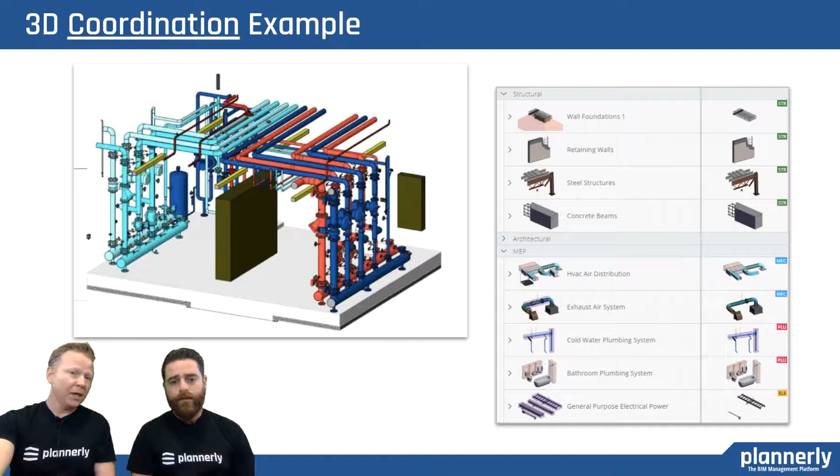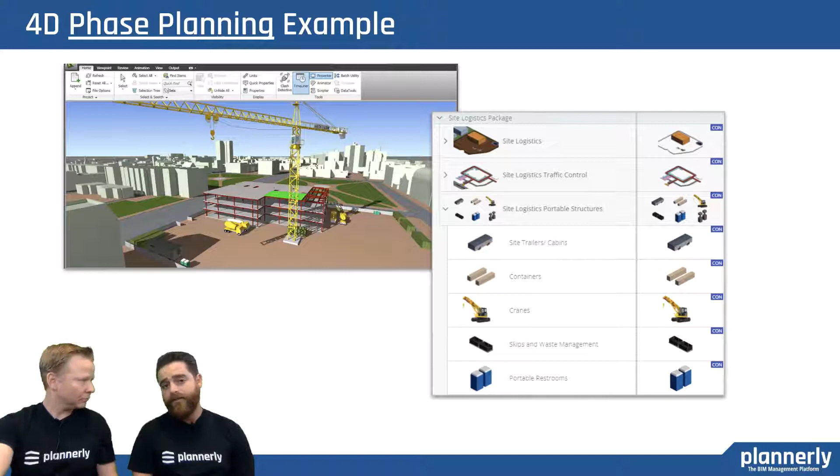But showing examples of what that might actually take, so you're on the same page, what the scope would be and what the output would be. And then 4D phase planning, showing the owner an example from a previous project. Again, seeing the amount of effort from the scoping and seeing the output is really powerful, and showing them all the benefits of that as well. There's a lot of safety now for phase planning. Sequencing and safety.

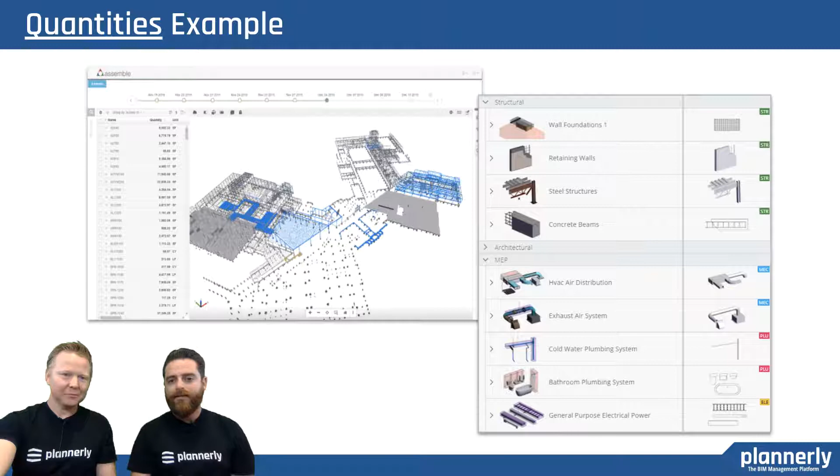And then quantities, how more accurate quantities might benefit the owner indirectly or directly. Being able to tighten the risk and be more sure on the outcomes is very important. These examples are more for helping them understand what it takes and giving them a little bit of education, not just saying we can do this, we can do that, but getting into the details of what it actually takes to accomplish these BIM uses, and it'll help them make a better decision.

And then a couple that might be more applicable for the owner: being able to virtually walk through their building, most popular now, taking different examples and that hardware to the meeting so that they can actually experience it has been very powerful and very well received. But understanding what the commitment is, what scope is required in order to get to that photorealistic walkthrough.

This is a really good example, because an owner who does not know much about BIM and what it might take might think, you're doing coordination, so let's do AR, VR. And they'll jump into the headset and go, hey, why is all the piping magenta? Why is the duct blue? That's not realistic. Is it really going to be blue in my building? And that right there is not aligning those expectations. They thought, you're already doing it in 3D, why don't you just slap some material on?

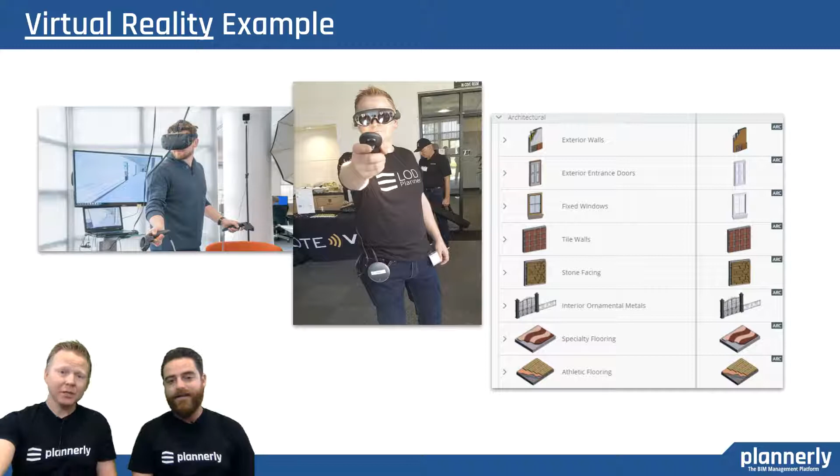We all know that's not a realistic expectation, as someone who knows what it takes. So understanding the finishes and the time it takes. It's not their everyday job. So again, that's just another example of those connections. And then one of the very key ones is what's required for handover at the end of that workflow.

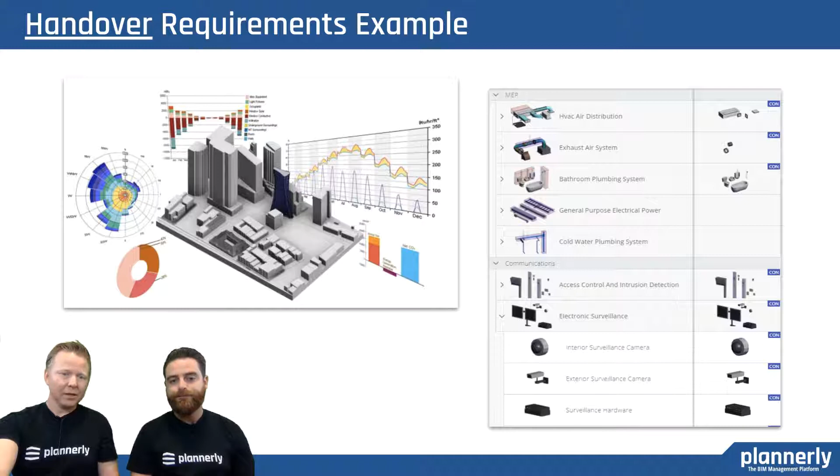And the person you might be talking to in that meeting, who's speaking on behalf of the client, may not be the person that runs the building afterwards and manages the facilities. So having the right person inside that meeting, bringing in the facilities manager or director, having them come in and say, this is the equipment I need, and this is the information it takes.

So Ted also understands that he can be too technical. One of the ways he is able to remain out of the weeds and not get into those detailed technical explanations is by using pictures. And a picture, we all know, is worth 1,000 words. So if Ted can build up that agreement using thousands of pictures, how powerful would that be?

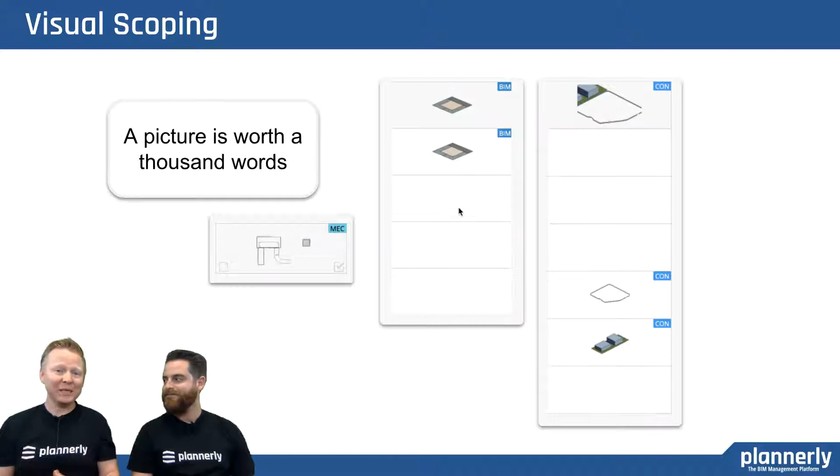And we know firsthand how owners absolutely love being able to truly understand what they're going to get in this way. So visually scoping the project is really beneficial when you're sitting down with an owner. It really helps, because going through an Excel spreadsheet or a long Word document, we all know we're going to zip right through it and say, yep, read it, agreed, let's go.

That was why Frank's guys were laying asleep. Yeah. He was reading every line item, showing an Excel spreadsheet with a bunch of numbers.

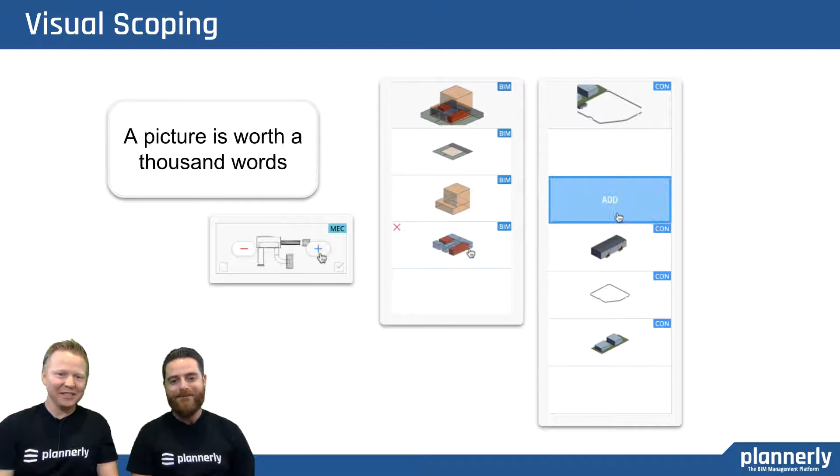Ted also understands that templates can save a lot of time and reduce risk. So rather than copying and pasting a whole bunch of things that he might not need, he can use templates and be selective. Yeah, and you know, we speak with a lot of people who are developing those templates because they understand that every project is unique, and bringing in that risk is not really great, not only for the client but for their own company and, you know, liability things that might come up.

So these templates, keeping them basic. If you are someone who is developing those templates, think about the non-project specific items, leaving yourself little red highlights or something that you can come right in and fill in that project information once you've received it. So a lot of that kind of workflow that you put into your templates that you're building alone or with your team could really go a long way. Yep.

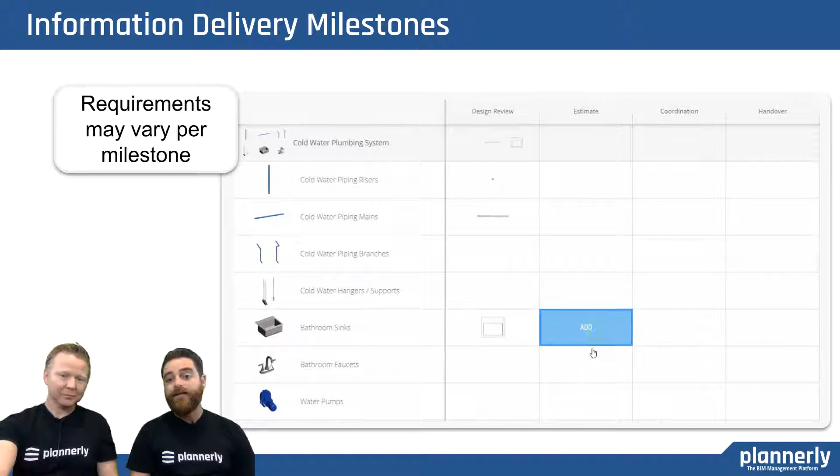Ted also understands that each BIM use can have completely different requirements. Right. And so he sees the ability to define information delivery milestones and vary what is required on each milestone. Yep. Pretty simple, using that visual nature, not asking for everything, not asking for the entire scope in the design review phase, only asking for certain information in the estimates, and then focusing on the actual coordination elements that will be needed. And along the way, scaling that level of information or level of geometry as it's needed, and not something that's just forced right at the first milestone. Yep, deciding when and which milestone is required.

Ted also understands that aligning expectations is everything. So what is important to the owner? I think Louis just mentioned that as well. In a milestone for delivery, we really want to understand which elements out of the set that we are creating for the project anyway does the owner want, and also what might be required that is not part of the existing scope for project teams.

And this is something we've heard a lot of feedback from our customers and users who are coming back to us and saying that they are now able to build a more collaborative scope with the owner because they get them engaged, because they invite them to help create this. Because they can understand it. They understand it. They're not getting lost in the definitions of this LOD or what's required; they are just keeping it down to the basics. Yep. But doing it together, not something that's saying, this is what I propose, or what do you think you should give me as a scope? Why don't we sit down, agree on the use?

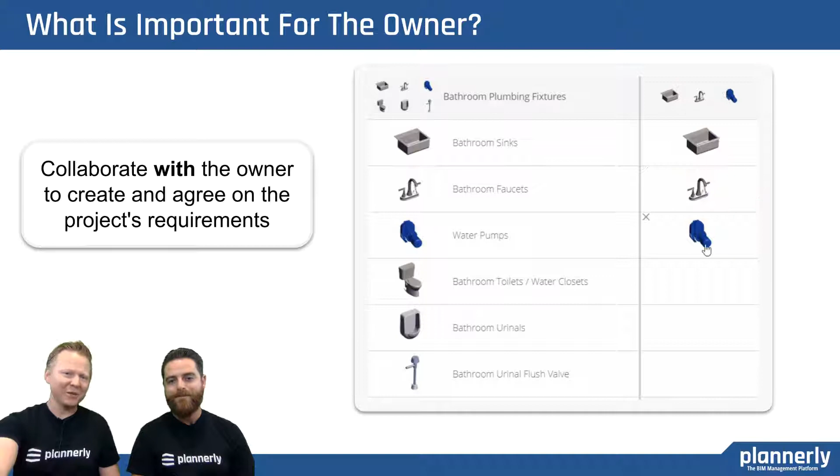It takes 45 minutes in a meeting room, and you see the difference between, yes, okay, Frank and Ted, but we have real life people that are also going through this process, and we have a couple of quotes at the end as well. So the principle is really interesting to be able to define this visually, but Ted also understands that it needs to be lean. So lean information requirements and lean workflows can save the owner time and also please the owner enough so that they would want to work with you again.

And being able to define project-specific information requirements is part of this. Having a library of all of the information requirements that you might use across all of your projects, but also being able to, for a specific project, just add the ones that you need. Louis and I have personal experience on this where, working as an owner, literally only needing 17 different parameters, different information data types, that was all that was needed for the set of projects. So you didn't need a raft of thousands of information requirements.

Yeah, we originally had a meeting with the facilities owner, the clients, and everyone who was involved, and we agreed that 17 parameters were needed and only for certain equipment. So it wasn't 17 on everything either. Yeah, not on everything. Very targeted. So we had a clear list of what was needed, and a clear list of what information was required and by when. So that really helped my team model and provide this information in a timely manner.

Ted, understanding also that he needed targeted information, made it much more achievable. So in that example where we picked 17 different parameters, we're then targeting the assignment to only specific elements that are requiring certain information, whether it's an asset for handover or it's an intermediate delivery between team members because somebody needs some type of information.

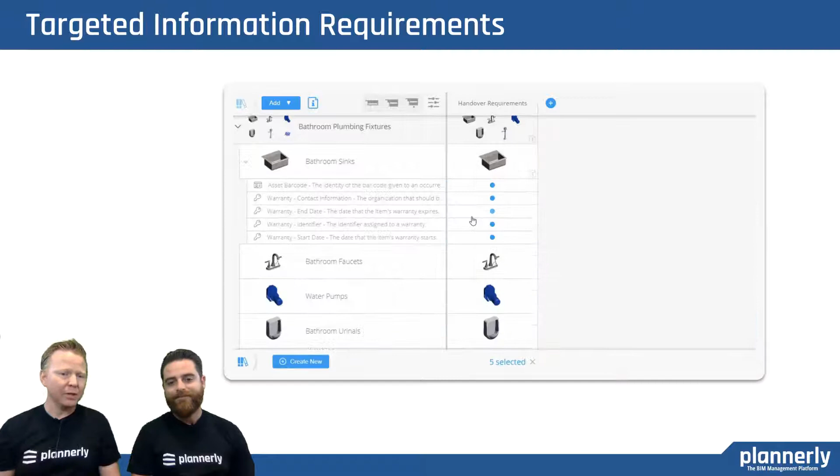So targeted information requirements rather than broad brush, I need information on everything, is a big time saver, a big way of leaning up the scope. Ted understands quite a lot, doesn't he? Ted also understands. That is amazing.

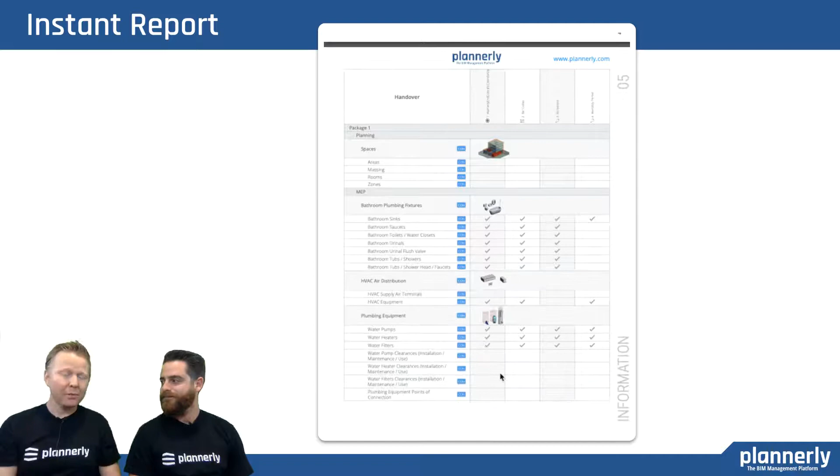The agreements must be printed in a contract as well. So being able to instantly, in the meeting that you're in, click print and say, this is my handover documentation, and this is what we have agreed to. These are all of the information requirements that we have agreed to, and it's in a nicely printed and formatted, rapidly created report. And then finally, collaboration.

Ted understands that we need to be able to achieve BIM compliance. In order to do that, we need to bring everyone along from day one and include those teams in the collaborative environment so that they can agree to, they can help craft, and then we can track and manage and then verify. And if you were on earlier, you will have seen the verify. Pretty excited about that. And being able to track what has been verified and visually, before you publish a model for use, a very, very important step in the workflow.

Yeah, I don't know how much I can emphasize this more, but if you've been in a meeting and it could have been 1 hour, 2 hours, and you've gone through all this work, and to not share this information, it just seems like what a waste of time that you had with that client. So really engaging and making sure that the people who are actually doing the work do have access to this information, whether it's a PDF or access to a collaborative platform. It's really important to make sure that the person who's modeling, whether it's an intern, a junior designer, someone who's actually doing that work, has their hands on the assignments, on the document, on that information.

Imagine not leaving that meeting with a whole bunch of to-dos and a whole load of tasks and a whole bunch of formatting, reporting, and everything else, and telling the client, I'll get back to you. Imagine being able to, at that meeting, deliver a cohesive agreement based on exactly that 45-minute conversation that you've just had. Yeah. The power and the benefit in relationship building that can have. That is why Ted was able to run a badass meeting. Big badass BIM meeting.